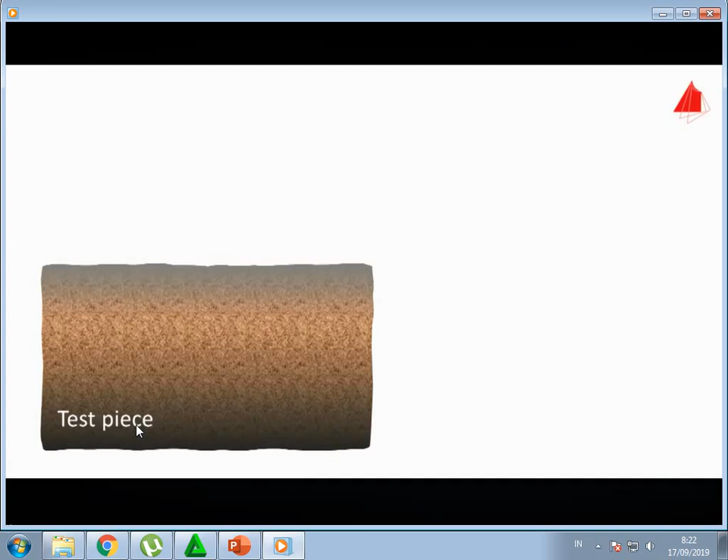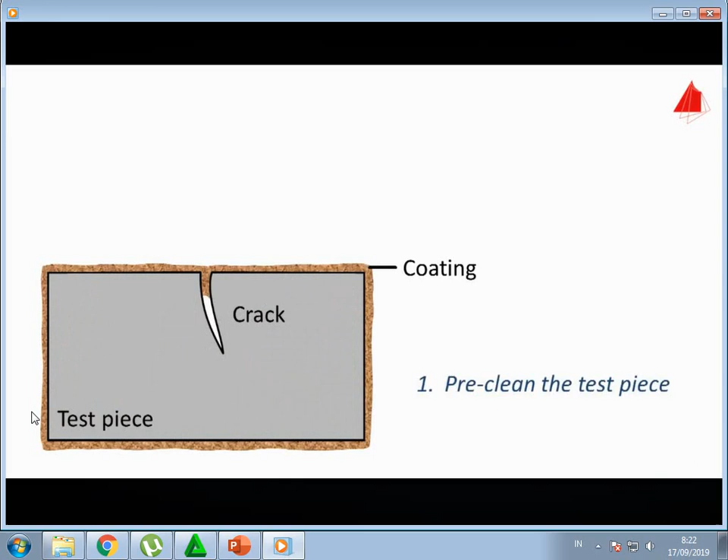Dye penetrant examination is an important method of non-destructive testing of materials. This is the basic principle. Often the surface of a workpiece is covered with rust or paint, which masks the material defects, as shown in the sectional view. Therefore, the first step is always the pre-cleaning of the test piece surface. This must be done very thoroughly, so that any defects present, here it is a crack, are open to the

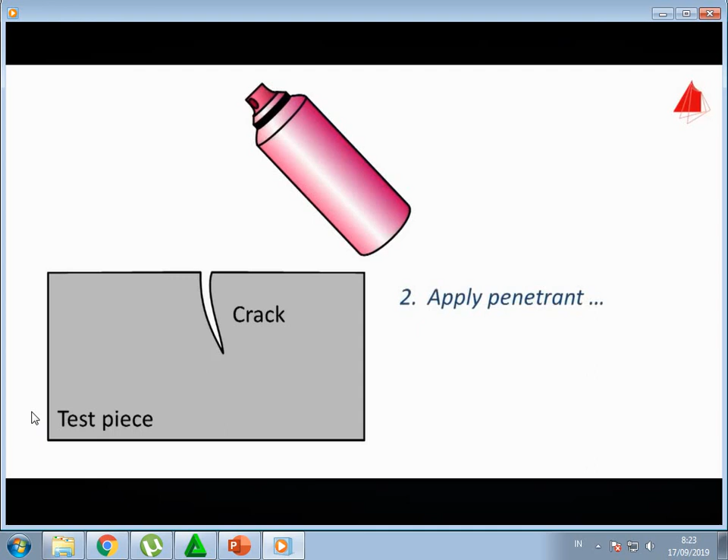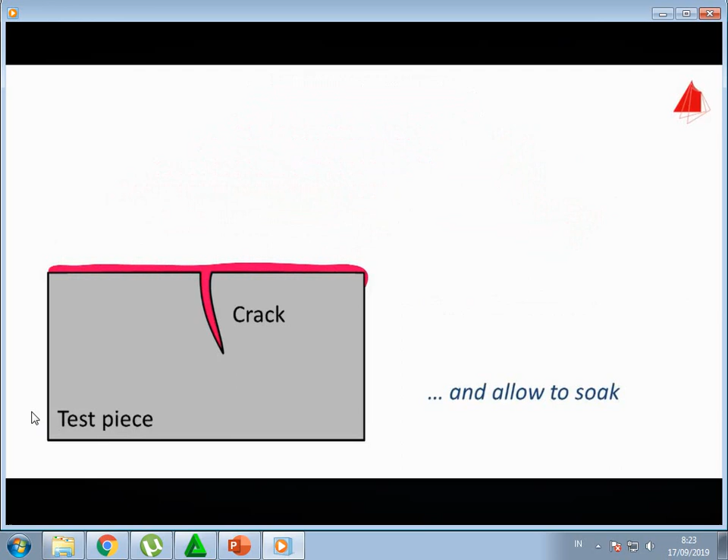surface. In the second step, the penetrant is applied to the test piece, usually red-colored low-viscosity oil. Due to the penetrant's high surface wetting capability, it penetrates into the defects and cracks. After several minutes of dwell time, the third step is to rinse the part's surface cautiously with water. The water removes the penetrant completely from the surface, but leaves it in the crack.

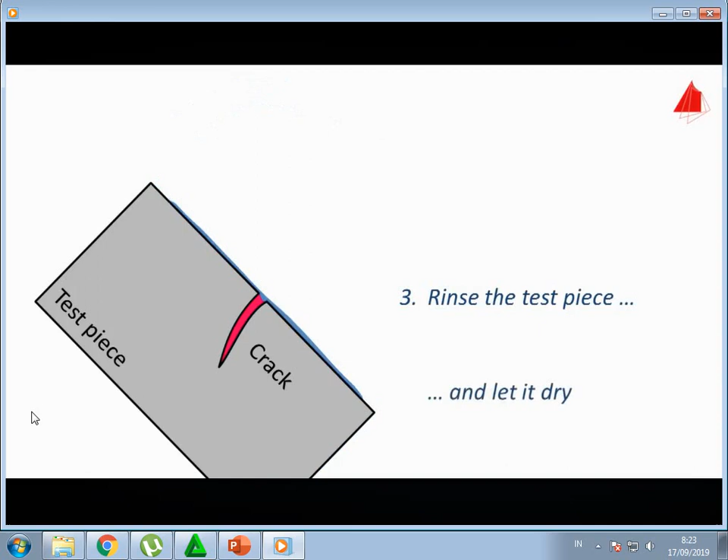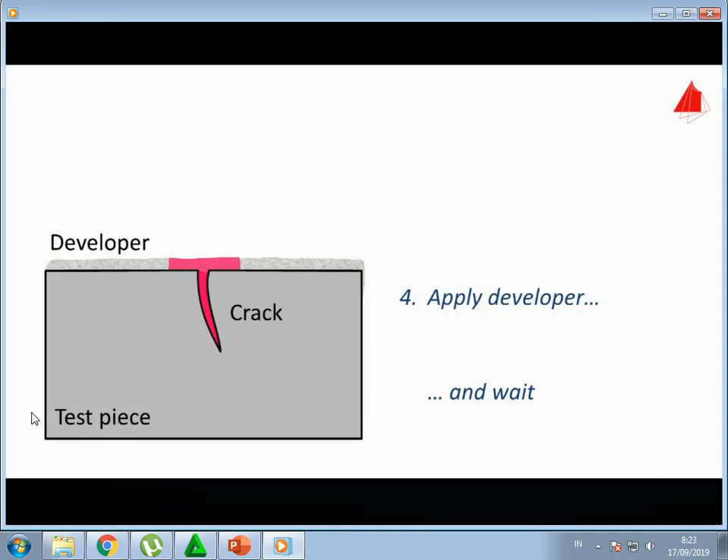Now, the fourth step. After drying the test piece, a developer is applied onto the surface. The developer is a fine-grained white powder suspended in a liquid. It forms an even coating on the surface. After drying, it draws penetrant from the crack out onto the surface. The location of the crack is indicated clearly on the surface. And this is how it is carried out in practice.

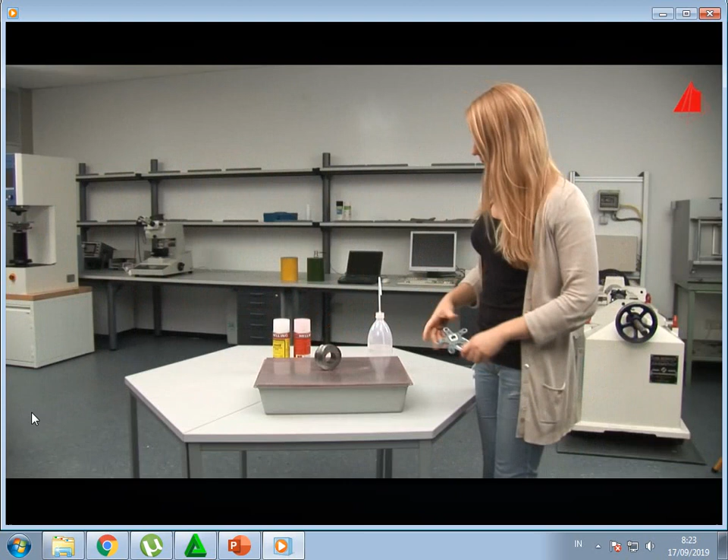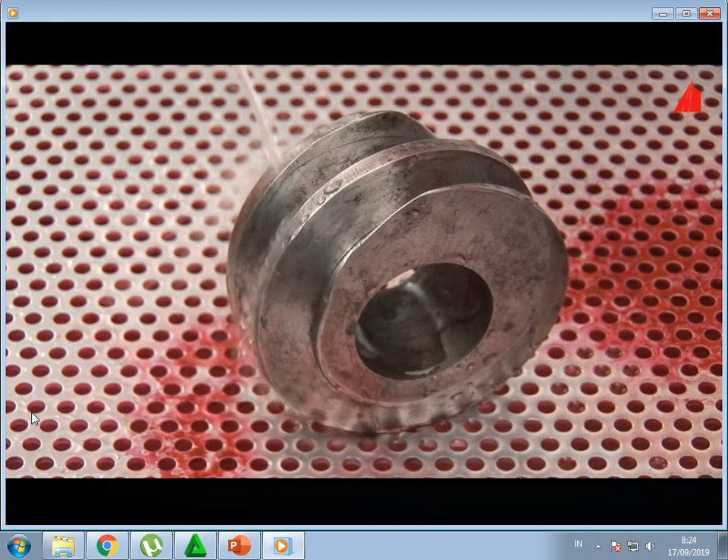We wish to inspect two samples, a segment of a worm gear shaft and a broken bicycle crank arm. Both test pieces have already been cleaned. First in line is the worm gear shaft. The material tester applies the penetrant. After a dwell time of about 10 minutes, she removes the excess penetrant from the surface by rinsing the test piece gently with water. She takes care not to rinse for an unnecessarily long time, because the penetrant is supposed to stay in the defects. Now, she dries the surface of the sample with a cloth to absorb the excess water.

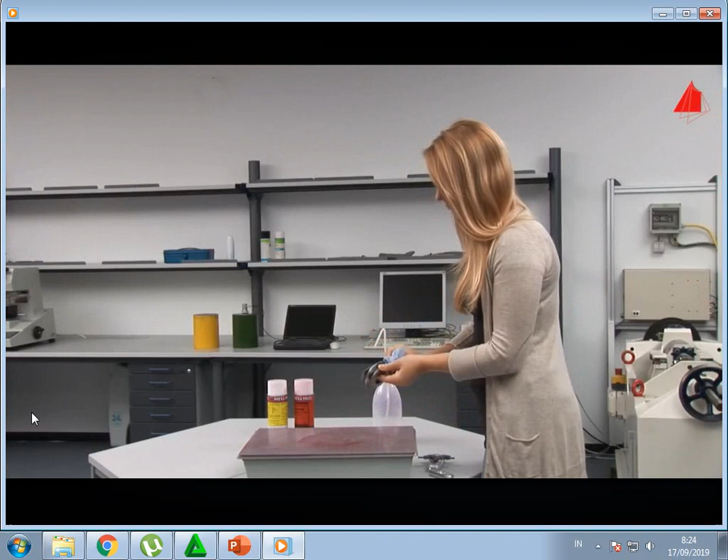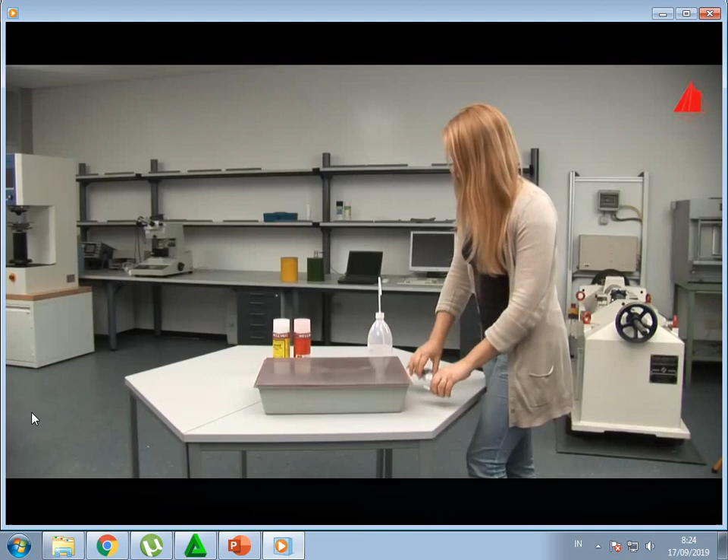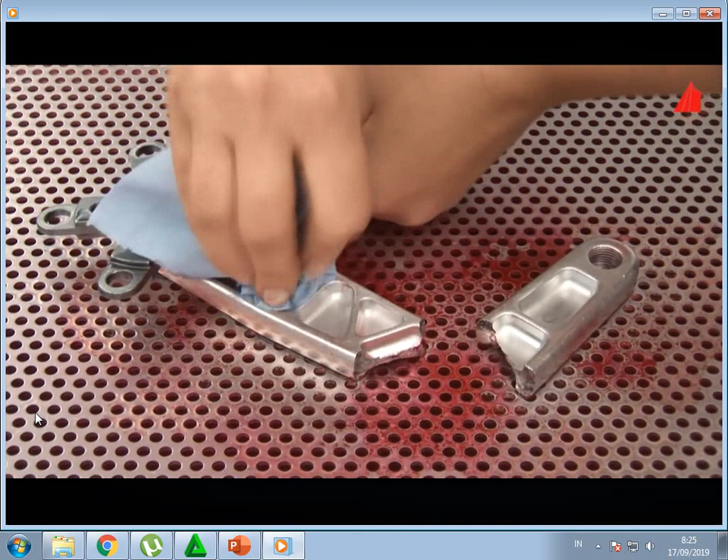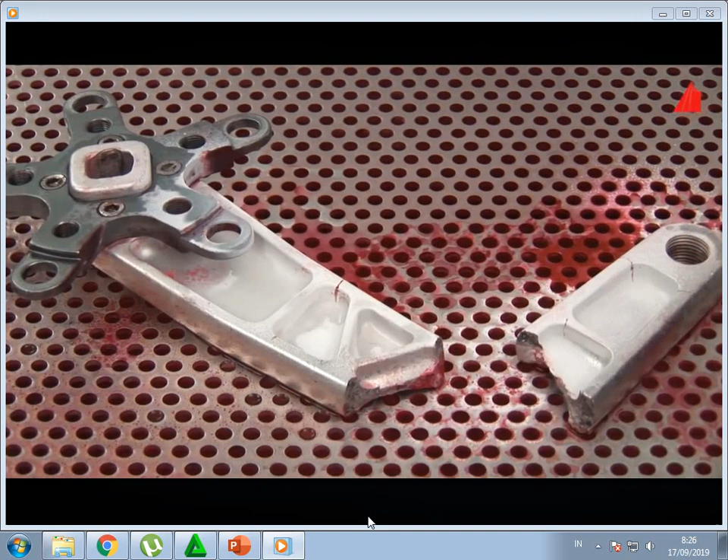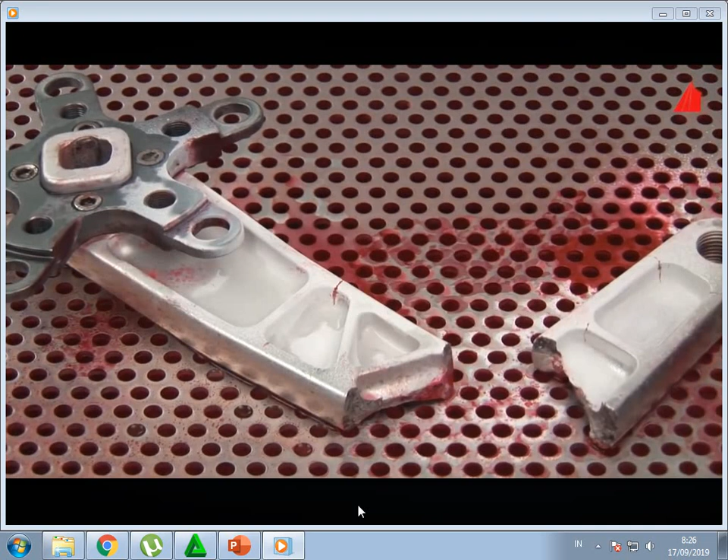Finally, the pros and cons at a glance.

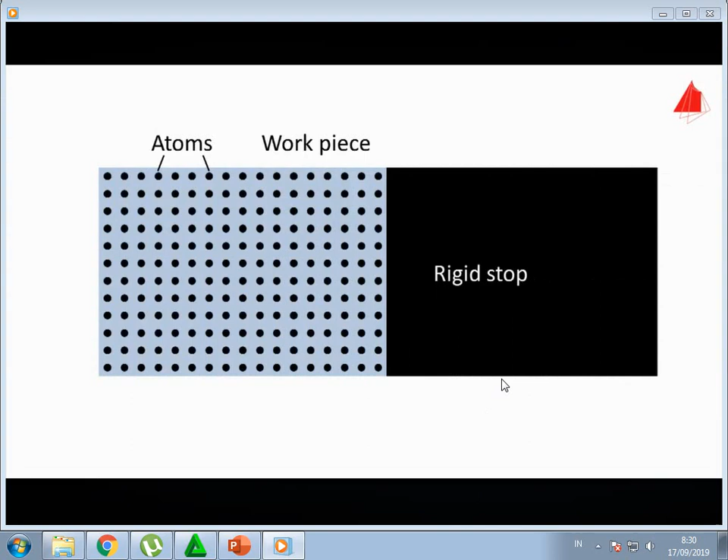To begin with, a rigid, unyielding stop is attached to the right front end of the cylinder. At the left front end, a disc is installed. It will be used to transmit and receive sound waves. Pushing and pulling briefly at the disc causes a longitudinal sound wave to propagate through the cylinder.

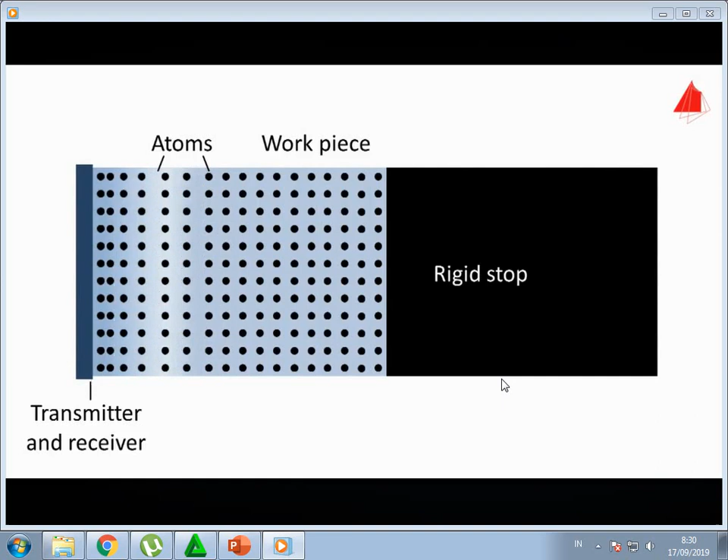When the sound wave reaches the rigid stop at the right side, it is reflected and runs back towards the disc, which now serves as a receiver. A free end is also able to reflect a wave. In this case, however, the tensile side runs ahead in the reflected wave and finally deflects the receiver to the right. The reflected wave is even reflected again and actually travels several times across the length of the cylinder, but this is not shown in the animation for the sake of simplicity.

So, if a sound wave is generated at one end of a workpiece, it will travel through the material with its speed of sound. At the free end of the workpiece, the sound wave is reflected and it returns to the transmitter, which then acts as a receiver.

For ultrasonic testing of a workpiece, not a large transmitter is used in most cases, but a rather compact one, which generates a short ultrasonic pulse. At a place free from defects, the ultrasonic pulse travels to the right front end, also termed the back wall. The pulse is reflected and recorded again as an echo.

When the transmitter is moved a little downwards, the cavity reflects a part of the wave. That part arrives earlier at the transmitter than the rest of the sound wave. Even further downwards, the cavity reflects the complete ultrasonic pulse.

For material testing, either the echo of a defect can be utilized, this is the pulse echo mode, or the phenomenon that hardly any sound waves pass through the imperfection. This is called the through transmission mode.

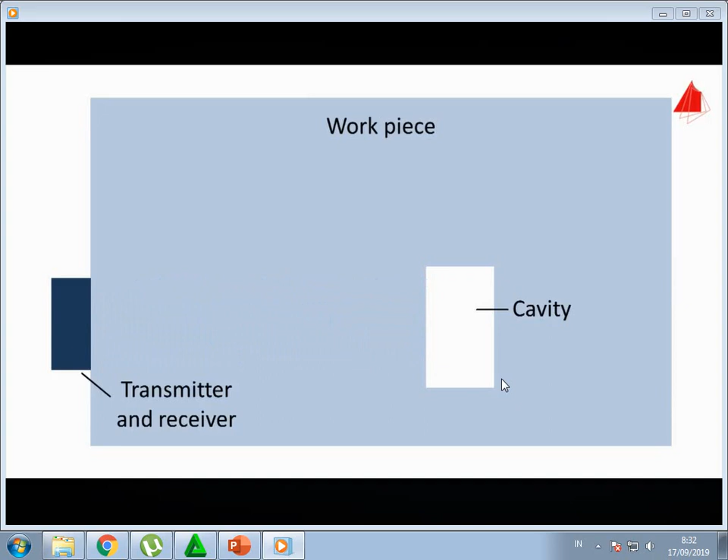In pulse echo mode, a transducer installed in a probe performs both the sending and the receiving of the ultrasonic pulse. On a computer monitor, the intensity is plotted upwards on the y-axis and the time towards the right on the x-axis.

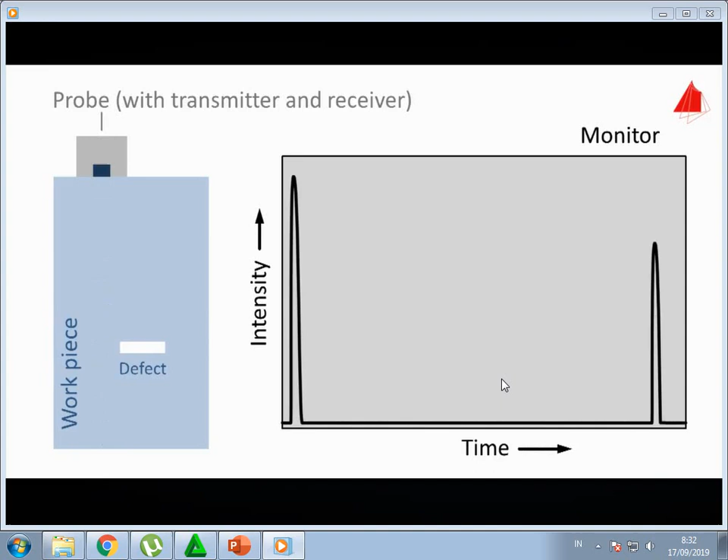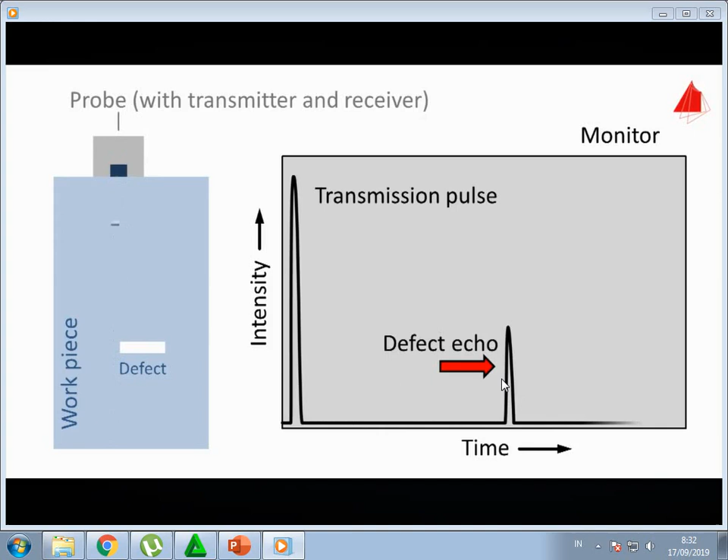With the probe at a place free from defects, only two signals may be seen on the monitor: the transmission pulse and the echo resulting from the lower surface of the workpiece, termed the back wall echo. Moving the probe towards the right leads to an additional echo created by the defect. Even further towards the right, only the defect echo is visible apart from the transmission pulse.

In our laboratory, there's a green painted steel cylinder to be found. It contains artificial defects which are invisible from the outside. To track down the defects, the material tester uses the pulse echo method.

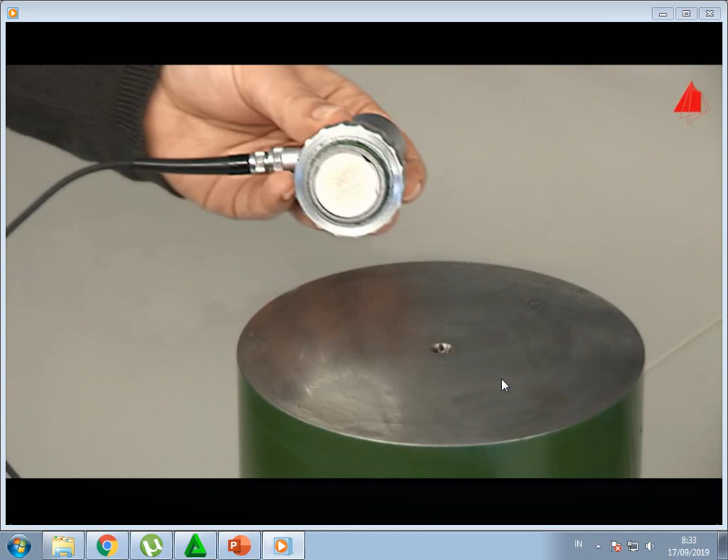This is how a typical probe looks like. Under the bright wear plate, a piezoelectric disc is installed. It can transmit and receive ultrasonic pulses. A computer operates the probe via a plug-in card and power electronics. On the monitor, the intensity is plotted upwards and the time is plotted to the right.

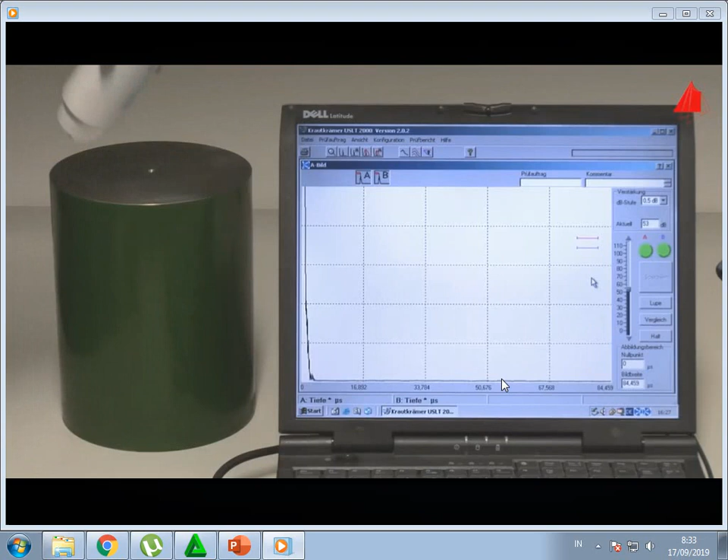After placing the probe on top of the cylinder, initially no echo at all may be seen on the monitor. The reason for this is the too small contact area between the probe and the workpiece. Only with the use of a gel, the so-called couplant, can the ultrasonic pulses get into the workpiece and go back into the probe.

Now the back wall echo turns up on the monitor. The material tester spreads out the gel evenly on the top surface. That way she is able to examine the entire cylinder.

Using the velocity of sound in the material, one can plot the calculated depth on the monitor to the right instead of time, a very useful feature. With the help of so-called trigger gates, which may be set on the echoes with a computer mouse, the depth of the defects can easily be read off at the lower left-hand corner of the monitor.

The cylinder back wall lies at a depth of about 200 mm below the probe, so the cylinder has a height of 200 mm. And here we go. The material tester scans the upper front end of the cylinder with a probe and observes the monitor.

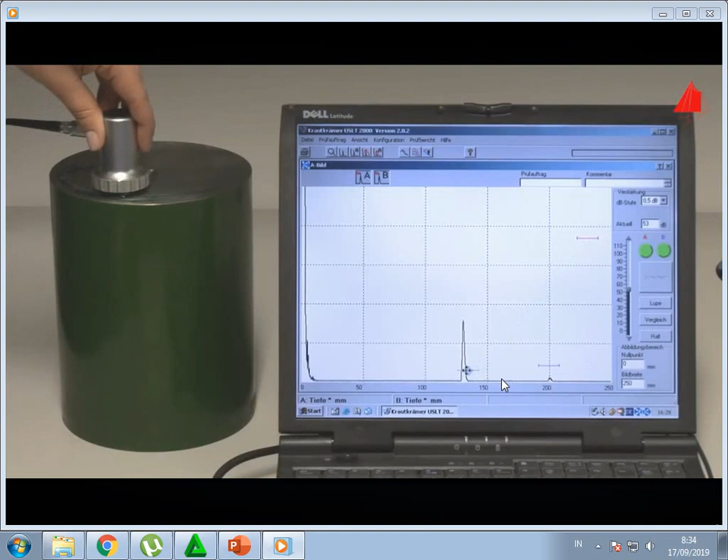A defect echo appears on the monitor. This defect is located at a depth of 130 mm below the surface. Another echo indicates a defect at a depth of 87 mm. The second smaller echo at 174 mm is caused by double reflection on the same imperfection.

And these are the defects: a drill hole and a saw cut. Filled up near the surface and painted, they are not visible from the outside. The drill hole is at a depth of 130 mm, and the saw cut 87 mm below the surface.

Trams are popular means of transport in Karlsruhe in southern Germany. The tram cars are not only cleaned regularly, but also tested thoroughly at regular intervals by the transport company. Among many other maintenance points, the ultrasonic examination of the wheel axles plays an important role.

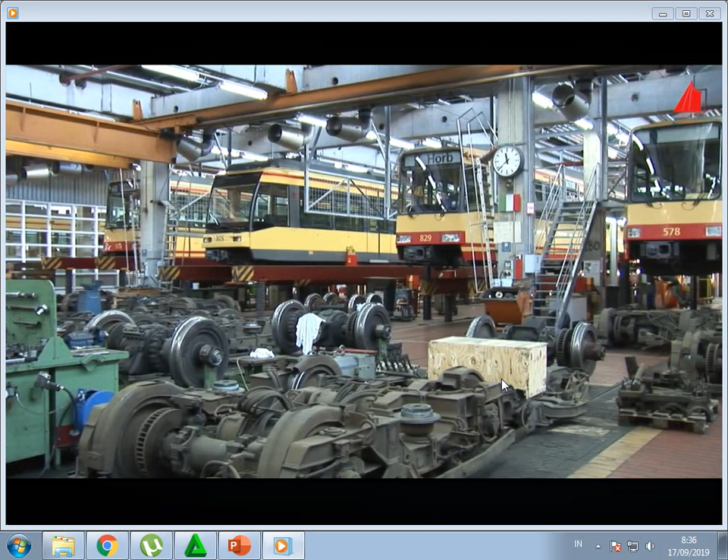A tram enters the maintenance hall for inspection. Some of the tram cars have already been lifted up, so the bogies can easily be detached, pushed forward and examined carefully. This is one of the bogies, jacked up to a comfortable working height and prepared for ultrasonic inspection.

Special attention is given to the wheel axle, among experts known as the wheel set axle. It has been designed as a hollow axle. This saves weight and facilitates the ultrasonic examination. The material tester applies a suitable oil as a couplant into the bore of the axle.

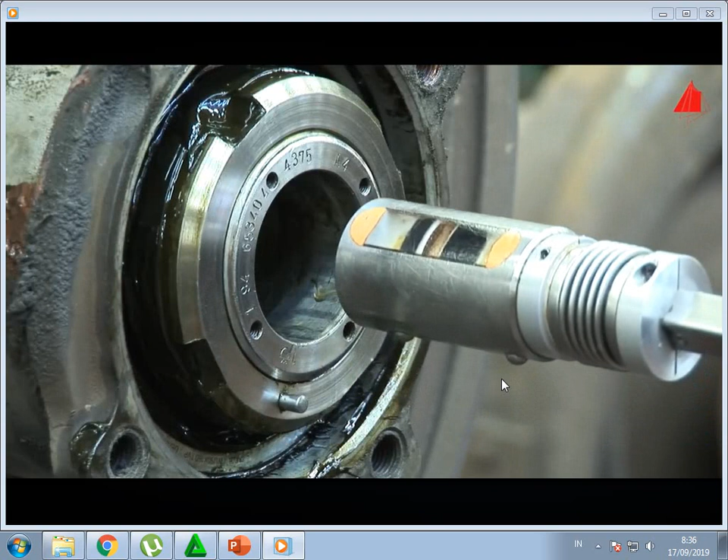Now he takes a special probe designed exactly for this purpose, inserts it carefully into the bore with a mount, and evenly spreads out the couplant by turning and pushing. He has accurately marked the most important examination points on the mount.

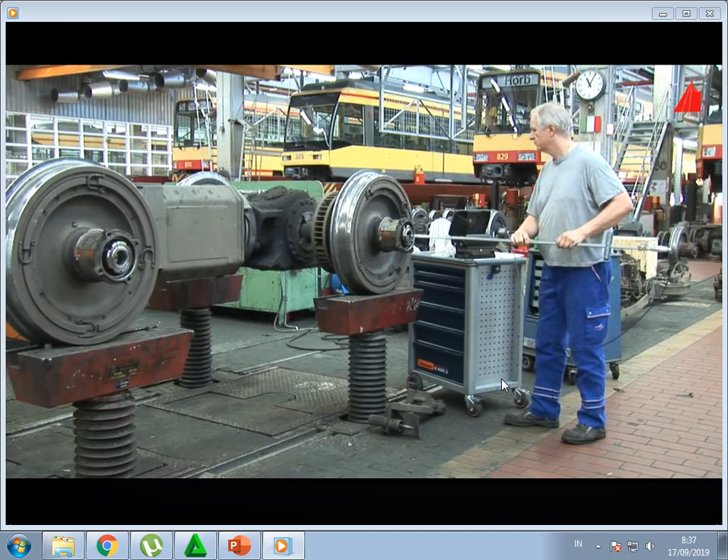In an experienced manner, he positions the probe at the appropriate places within the wheel set axle and watches the monitor closely. The probe has been specially designed for this application. It transmits the ultrasonic pulses at an angle of 45 degrees. At a place without defects, no defect echo returns.

But when the pulse encounters a crack which has grown in from the outside, double reflection occurs and a typical defect echo is recorded. It is important to note that also the shape of the wheel set axle may lead to an echo, for example at shoulders. These are so-called contour echoes.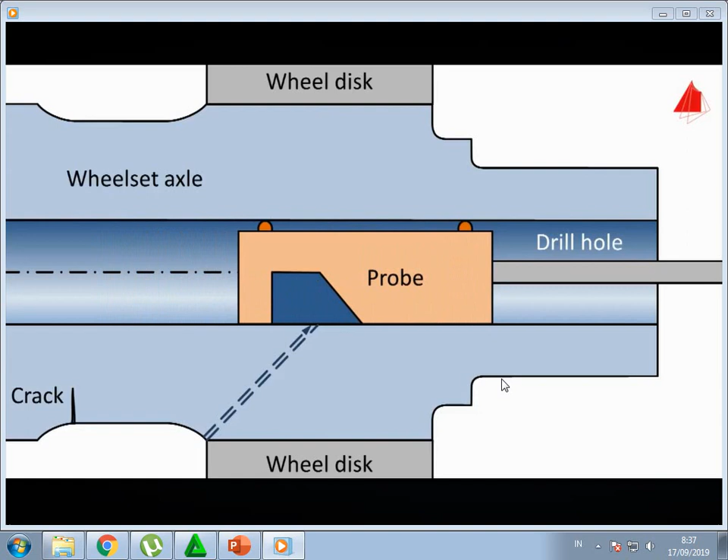In this particular case, only contour echoes are recorded. No abnormality has been detected. The wheel set axle is perfect and can be used again to transport many passengers until the next examination becomes due.

Non-destructive testing, magnetic particle inspection. The magnetic particle examination is an excellent method to investigate near-surface defects in ferromagnetic materials. This video shows the basic principle and the practical procedure.

The material tester gets the machine ready for use and inserts the test piece between the two poles of an electromagnet. Then she takes a bottle with a suspension of magnetic particles, turns on the electromagnet with a foot switch, and applies the suspension of magnetic particles onto the test piece.

Already in daylight, dark lines are visible on the surface. The lines can be seen much better under ultraviolet light, and particularly well when darkening the daylight. The suspension contains pigments that cover the magnetic particles and fluoresce under ultraviolet light.

The particles run off in areas free from defects, and they are attracted and clustered near defects. This workpiece shows a whole array of cracks. The basic principle is to magnetize a ferromagnetic workpiece parallel to its surface, as shown in the sectional view.

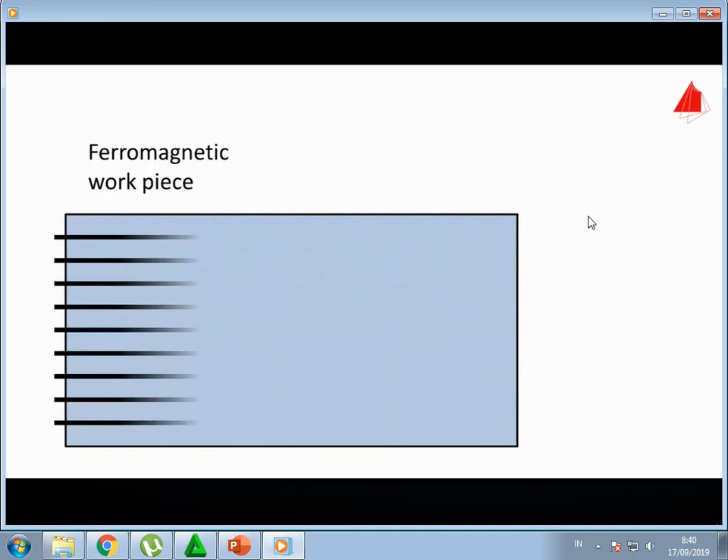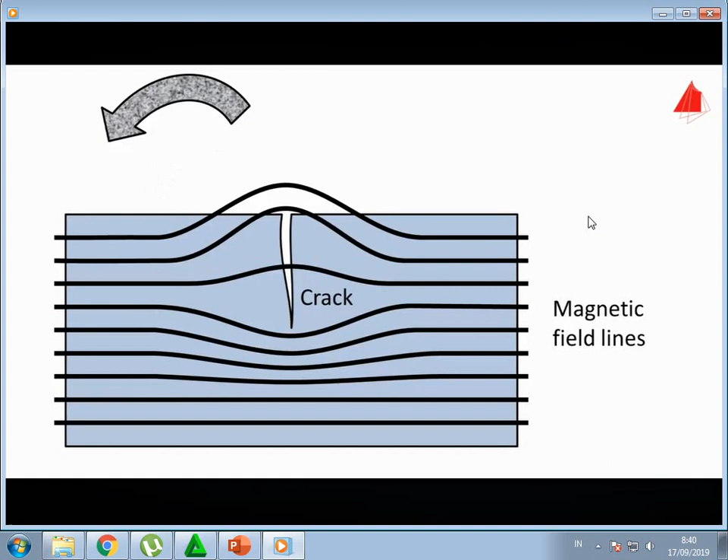If the workpiece is free from defects, the magnetic field lines run within the workpiece and parallel to its surface. In places of magnetic inhomogeneity, for instance near cracks, the magnetic field lines will locally leave the surface and a leakage field occurs. Now, if a suspension of ferromagnetic particles is applied onto the test piece surface, the magnetic particles will run off at defect-free areas.

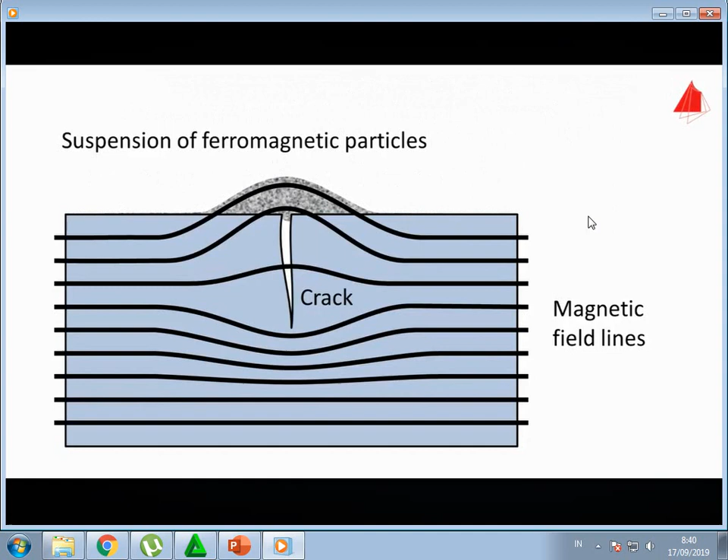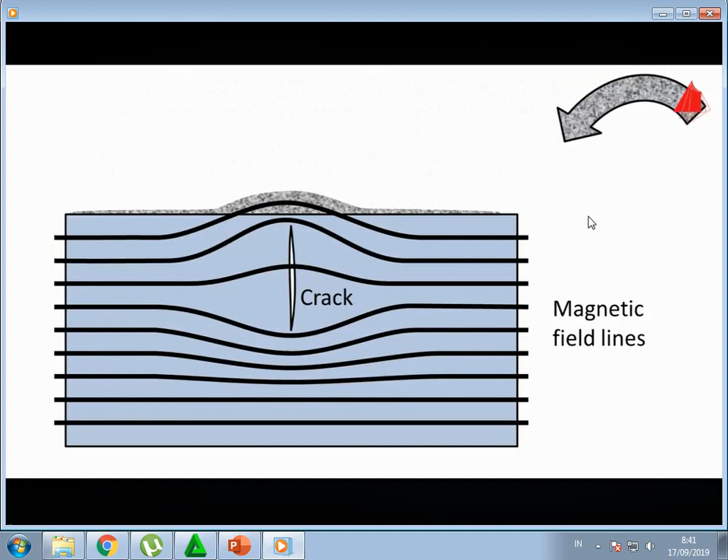In places of leakage fields, the magnetic particles are attracted and clustered together, thus indicating the place of the defect. The method works best using a pigment which covers the magnetic particles and shows fluorescence under ultraviolet light. Even cracks can be detected that are not open to the surface but just below it, as long as they are not too far below the surface. But one precondition must always be fulfilled: the magnetic field lines must be perpendicular, or at least at a certain angle, to the defect.

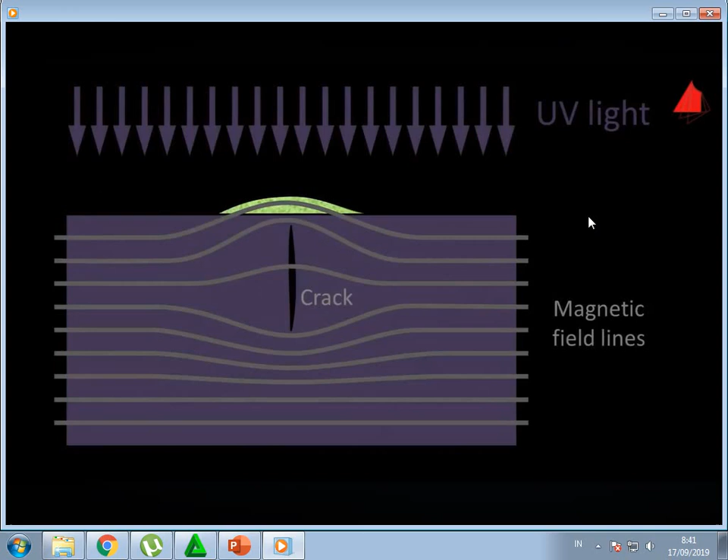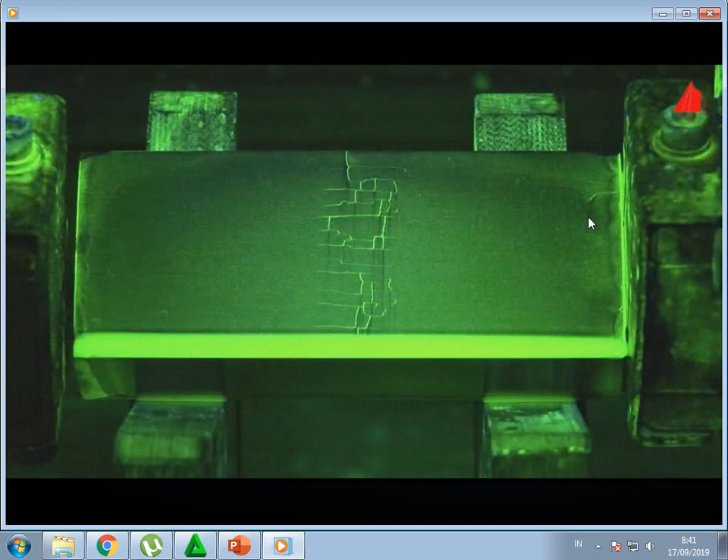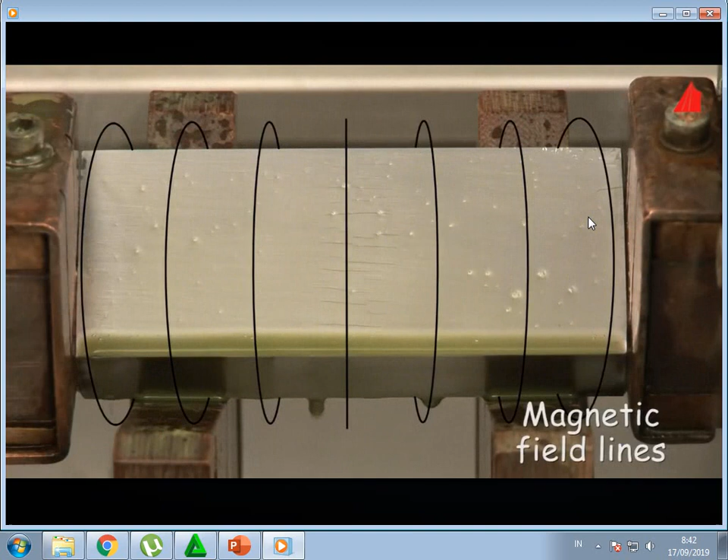Otherwise there will be no leakage field and the defects remain undetected. Our test sample has been magnetized in horizontal direction. The magnetic field lines run horizontally. This is the reason why cracks in vertical direction are visible particularly well. To make sure to detect all near-surface cracks, one has to magnetize the sample once more, best perpendicularly to the first time. To do this, the material tester switches the machine over to the current flow method. A high electric current flows through the sample, generating a circular magnetic field. Now the cracks in horizontal direction can be seen very well. The tested sample is a hardened sliding guide. The cracks have been formed during the hardening process and the subsequent grinding operation.

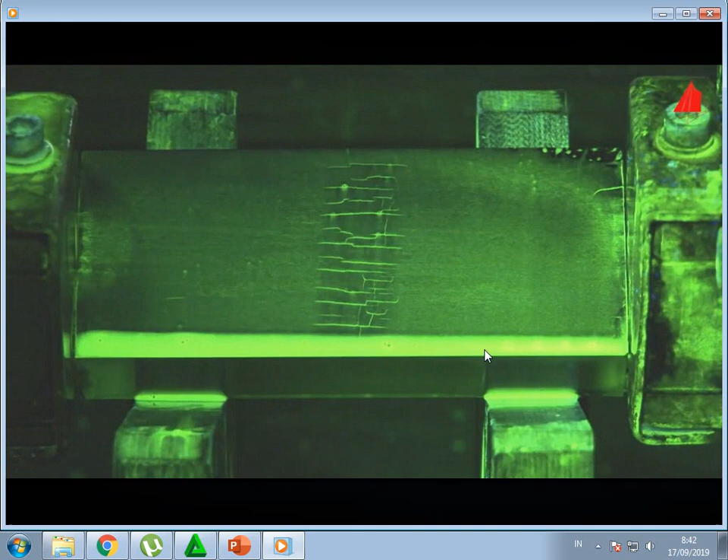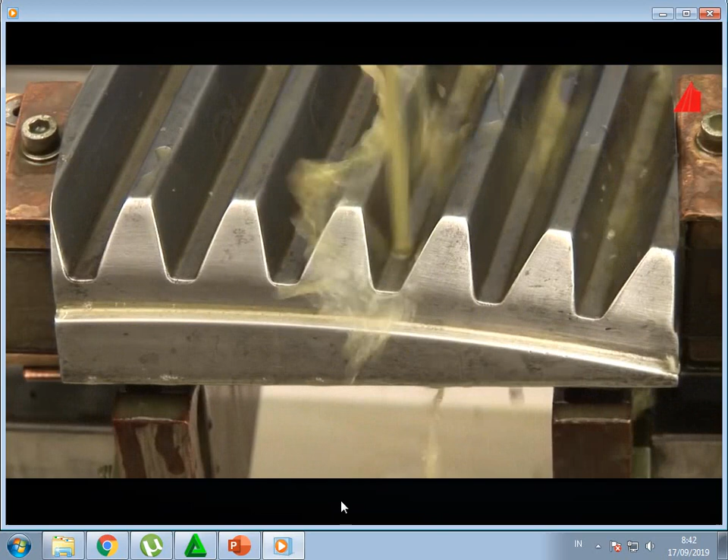Still another test piece has to face the magnetic particle inspection, a section of a large gear wheel. The same procedure again: placing the gear wheel between the magnetic pole pieces, magnetizing and applying magnetic particle suspension. Already in daylight, there are indications of cracks, and again, they are best visible under ultraviolet light while darkening the daylight. The visible cracks are so-called fatigue cracks. They have been generated during the operation of the gear drive due to a mismatch of the gear wheels.